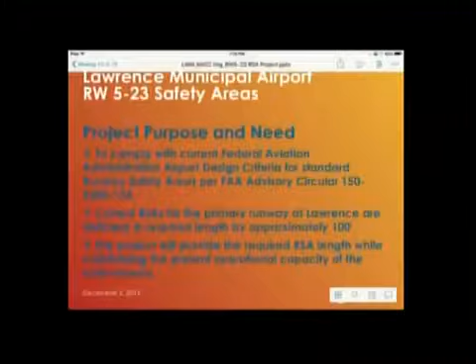Be you an airport in Arizona, California, or Massachusetts, these are the safety area requirements for your particular set of criteria at your airport. And it's a way of making sure you have continuity between the airport system throughout the country, and even internationally to some extent, because the FAA advisory circulars and design criteria end up in some of the federal international regulations as well. And so again, when a pilot leaves here and flies to another airport for the first time, he can expect a similar set of circumstances, requirements, design criteria at the airport that he's going to. He does not need to be familiar with that airport to be safe in landing, taking off, etc.

Current RSAs for 523 are 100 feet short. They need to be 300 feet long by 150 feet wide for the airport reference code for that particular runway. As we were with runway 1432, we are a B2 airport reference code. And if you were to go to the design criteria in that advisory circular, you would find a clearly written table requiring that 300 by 150 foot dimension for your RSA. So that is beyond the runway end. You need that level turf surface, suitably compacted to hold up an aircraft if it undershoots or overshoots a runway.

And now we have 200 feet plus or minus beyond each runway end. We need 300. So in the overall length of 523, we're 200 feet of level area short in what we need to provide safety areas at each end. And the project will provide the required RSA length while maintaining the present utilization of the runway, the present runway length, present runway operational capacity.

And the corollary to that is this project has nothing to do with improving capacity, improving the size or speed of aircraft that use it, or the number of aircraft that use it. It will have no effect on that whatsoever. It'll just bring that runway up into meeting one of the design criteria that the FAA mandates for an airport of this type. Next slide, please.

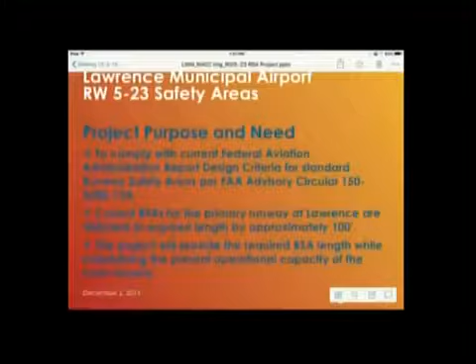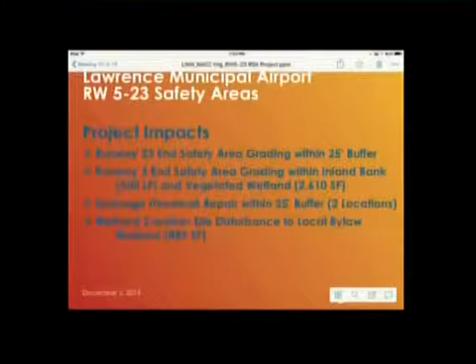We have a wetland creation site that is about 20 foot tall of old fill soils, asphalt, concrete, you name it, it's in there. Poor internal drainage has allowed the establishment of a little cattail stand on top of it. And in order to develop the wetland creation site, which is quite a large one, it's over 8,000 square feet, there is a local bylaw wetland associated with those cattails of 882 square feet that we'll be impacting to properly remove all that fill, remove all those invasive species, and actually create a wetland creation site at that location.

Good news, 882 square feet doesn't make it. It's not jurisdictional. Under your bylaw? 1,000. Aha. So, good. Missed that, sorry.

The runway 5 end, I actually pushed this alternative on the engineers. We were going to go with a straight culvert for the intermittent stream that we're crossing. I went with a relocation, so there's actually 600 linear feet of inland bank associated with relocating that intermittent stream around the end of our new fill. But by doing that, we're creating a certain amount of bank as well, and we're impacting 550 linear feet by relocating it.

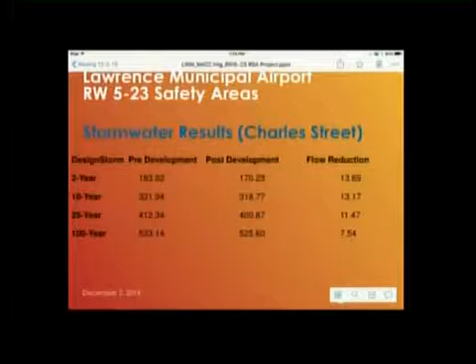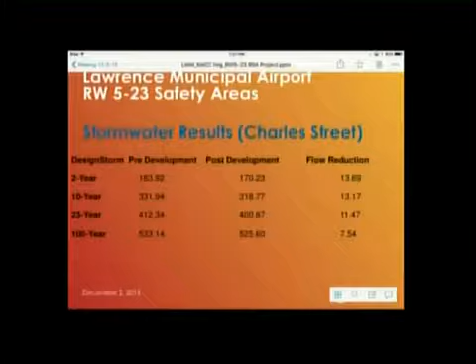Stormwater results. We have 2 design points, one at Charles Street, where our drainage leaves the site, and one at Holt Road. Charles Street, just real quick, for the 2, 10, 25, and 100, you'll see pre- and post-development. Because of this pavement reduction, we're actually getting flow reductions at those points from about 13.69 CFS for the 2-year storm, and at the 100-year storm, a 7.54 CFS reduction. So everything is less, and quite a bit less, over that span of storm events. Next, please. That's for Charles Street.

That is in the driveway going up to the sewage treatment plant. So all our drainage crosses their driveway in a double culvert. That's our design point. This one at Holt Road, if those of you know Holt Road real well, all our drainage from that 23 end of the runway all goes under a single culvert. It goes behind that capped landfill, and that's our design point leaving at that site. And you're going to see significant flow reductions, 20.95 CFS for the 2-year, 21.1 CFS for the 100-year. Again, mainly due to that 6.2 acres of pavement reduction at the site. Next, please.

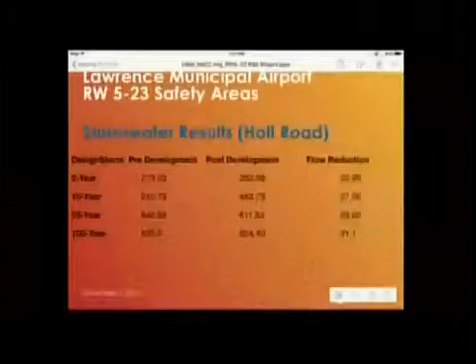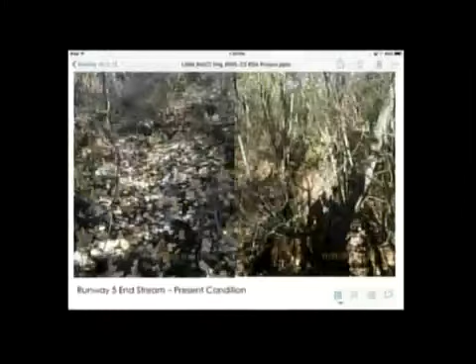And this is a picture of the channel on the left, and it's pretty tough to see, but that's about a 5-foot wide intermittent channel, devoid of water. It usually is. It's dry most of the year, but when it rains, it flashes up really quickly. It drains everything, all those residential side streets along Sutton Street, all the way up to where we have that storage garage on the airport property as you're on Sutton Street.

That whole area, all those hangars, it all drains down to this. All that residential side streets off Sutton Street all come down to this point. So it's a lot of pavement in this watershed, which explains the real flashy flow nature. So this is just two representative photographs showing the condition of the channel, its dry nature, and some of the typical vegetation associated with it.

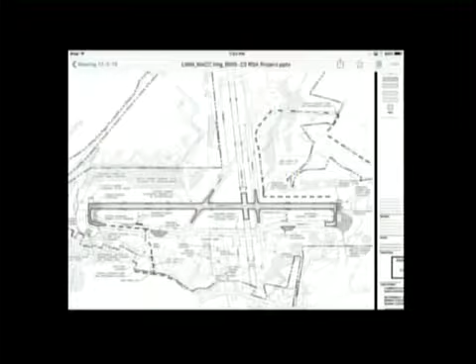We had to chase down that taxiway until we found a place where we could actually put a run-up area that wasn't going to interfere with wetlands. Typically, those run-up areas are all the way at the end of the taxiway, right next to where you enter onto the runway. And so he runs up his aircraft and enters onto the runway pavement right away. We had to come all the way down the taxiway to create two new asphalt bump outs, these run-up areas, kind of in an atypical location. And so those represent places where actually new surface will be paved for those run-up areas. Yes?

As another benefit for that one at the 5 end, we have residential properties pretty close to the property line there at the 5 end. During the master plan process, there were some complaints about the noise of run-up, and it can be a noisy process with some aircraft, and so that run-up area was moved a little bit further down, also to accommodate the wishes of residents that were on that master plan committee and had those complaints from that neighborhood. So there's another benefit of moving that run-up area further down the taxiway. Next, please.

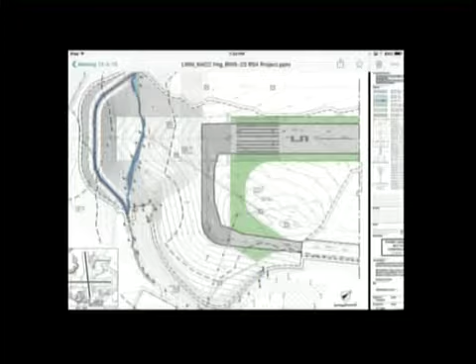So here's the 5 end. We have two blue lines there. The one that's very symmetrical is our stream relocation. The one to the right of that is the actual intermittent channel. We delineated the bank, which gave us the dark blue color there, and there were some narrow strips of vegetated wetland outside of bank in a few locations, and so you have some light blue along that that represent a patch of vegetated wetland here and there along that channel.

So we could have reduced the wetland impacts quite a bit by just going with a culvert through the fill. So if we had just put a culvert in the intermittent channel, we'd be reducing impacts quite a bit. For the stream openness standards and the stream crossing standards, we'd have a culvert somewhere in the 10 by 10 to 14 by 14 range to meet the openness standards because of the length of the fill here.

And the length of what we'd be putting in a culvert, that size culvert. We did a habitat assessment on this particular channel, and we do find it being used as a conduit for a wildlife corridor from a wooded section along Merrimack River to wooded wetlands that are just south of the airport along those residential properties. And I think we'd lose that continuity no matter what size culvert we put in there.

And so I came up with a concept of rerouting a channel around the end of our fill, revegetating it, and building it in such a way with bioengineering materials that provides for a higher order channel than we actually have there right now. I won't go into the details, but we have coir mesh logs, a lot of high-end erosion control fibers and fabrics in there, specialized seed mixes, live stakes and stickers of native shrubs versus the invasives that presently dominate that entire system. And so we want to recreate a stream system around our fill.

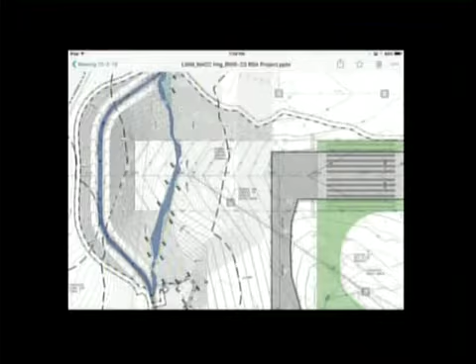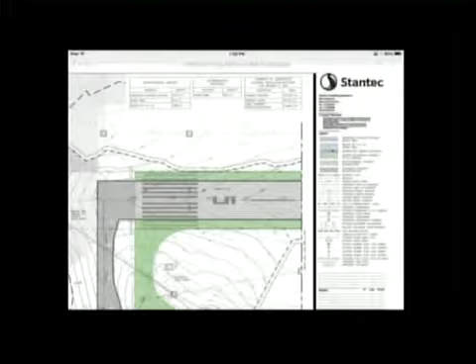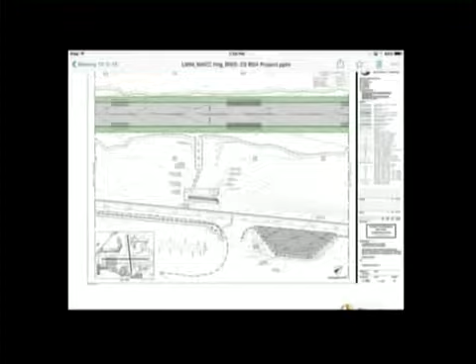At the 23 end, you're going to see something quite different. This is where, again, we shifted everything down to the 5 end to avoid the wetlands at the 23 end. This is just very quickly, typical along runway 5-23, the green represents area that is paved now that will no longer be paved. So you'll see a few slides here where it's just showing you the reduction in pavement width along this edge. Next. And here is that reduction again, and that changed run-up area. And here we are at the 23 end with the next slide.

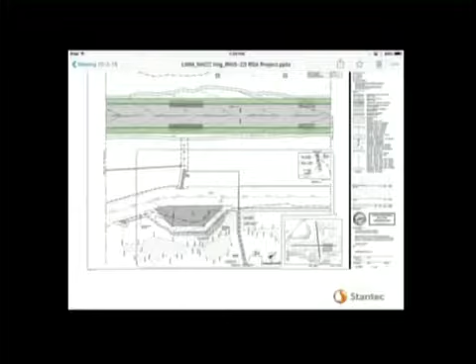So you're in buffer zone with this run-up area? Yes, we are. We moved it down. We came quite a ways down the taxiway. This was the first location available to us to actually build the run-up area. We are outside the 25-foot, but just like 26 feet away. We're just outside of the 25-foot with that.

So here's the 23 end. You're going to notice that there is a new threshold location. So you can see the faint outline of where the runway ends now with the barred lines. So we're shortening that by 100 feet.

We have to grade that side slope a little bit in order to get the level flat area right at the end of the safety area to give us our 300 feet. So everything is shortening up. The taxiway had to be chopped off and brought back into the new runway end. And all that green area that you see is currently pavement will now be topsoiled and turfed. And all the stuff that we reclaimed from that, all the existing subbase material and asphalt and everything, is going to be used in preparing the new base for our new pavement in our runway.

But we do have that grading right there at the end of the safety area, right above where that emergent marsh is, and that's necessary to support this level safety area and minimize how much we actually had to shift down to the 5 end to get the full safety areas. That grading that you see there at the end of the 23 safety area is within the 25-foot buffer of the local bylaw.

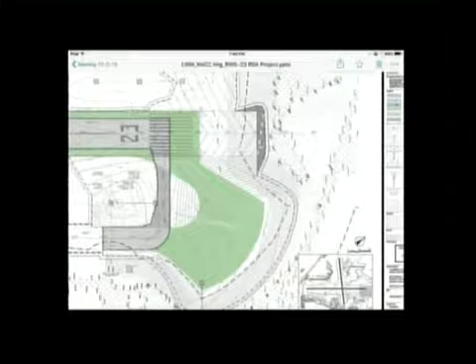But there are no direct wetland impacts at this end at all. And that's the good news with the shift. We avoid that entire system and maintain all of our impacts at one end. Next, please.

Back at the 5 end, and real quickly, there is an entire plan set in there showing you the different erosion control materials we are using for stabilization. We are going with 1-to-1 slopes in a lot of locations, trying to steepen up to minimize impacts. And because we are going with some steep slopes, we have to go through some extraordinary erosion control efforts to control these slopes. The most extreme, which we only use in extreme locations, is a reinforced slope with a riprap cover. You can see at the end of this 5 end that rock-looking type cover. We do have to use some riprap for the steepest section right there.

But as soon as we get out of that 1-to-1 and into something less steep, we are going with soil tackifier and erosion control blanket. That soil glue that we've used successfully on so many projects, and actually implemented on the 1432 project as well, we are using extensively here. And everywhere you see where we're grading in the buffer zone there, we're also going with just soil tackifier without the blanket on top of it. So this 5 end shows you where new pavement is, where the new runway end is, and some of the different erosion controls that we're using to control our slopes in this location. Next.

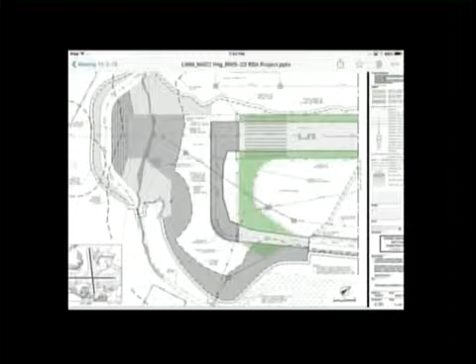23 end, same thing. You'll see a lot of the dark gray being the soil tackifier. You're going to see a little bit of the riprap right where we're getting down close to the wetland, again, because we wanted to hold that toe where it was. So we had to do a little bit of riprap for the steeper part, soil tackifier above it. The rest of the slopes right now are very steep. We're flattening them out a little bit, so they're much easier for Mike to maintain. Right now, he has a very difficult time mowing them.

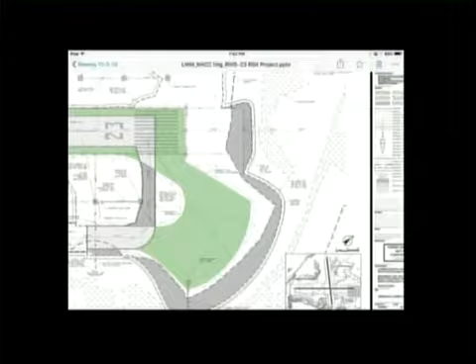So we're actually taking some of the steepness out of those slopes, using some of that fill for our project down at the other end. So there's a maintenance benefit for the airport. Steep slopes are never good from a drainage perspective, but also from a mowing perspective. So again, there's an entire plan set that shows the different erosion controls we're using throughout the project. Next, please.

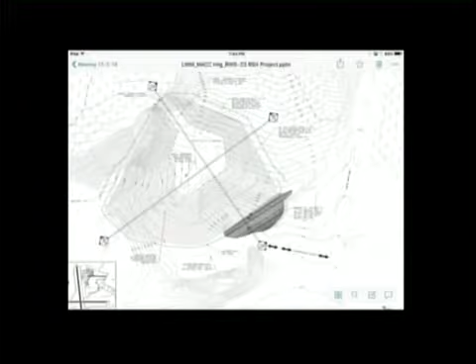This is our, and I don't know if you can blow it up, and thank you, Jennifer, that's great. Our wetland creation site. Again, we're trying to encompass that entire fill area, and more importantly, trying to maximize our grading where all the Japanese knotweed is. We have a bottom floor elevation of 96, and the 96-97 contour is where we get our 8,800 plus square feet of vegetated wetland mitigation here.

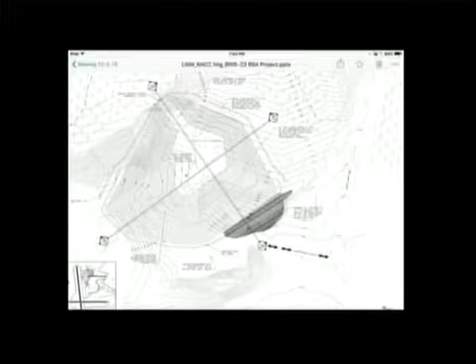We connect out to an existing wetland. The side slopes are not too bad. We go pretty steep right where it's connecting to the existing wetland to avoid taking down any mature trees along the existing wetland boundary. But as soon as we get outside of those mature trees, we go right into a 2-on-1 and 3-on-1. We flatten out those slopes quite a bit.

But again, as Jennifer and I saw in the field when we looked at this preliminarily, we want to avoid taking out any shade trees that happen to be in these fill slopes that are currently shading these wetlands. So the connection, I really tighten it up quite a bit. But as soon as I get out of the connection, we go with much flatter slopes.

This will be a shrub wetland. We have shrub plantings proposed. There is a planting schedule and a wetland seed mix proposed. There is an extensive native or naturalized upland seed mix for all the side slopes. We have a stockade fence to permanently mark and block this area. And there is a nice kind of a landscape type cedar stockade fence that will be installed here.

We also have an invasive species control that not only for our mitigation site, but we go 100 feet out into the adjacent wetland for a cut and dab of invasive shrubs, which are very prevalent in this wetland. We don't want them creeping into the mitigation sites, so we have quite an extensive invasive shrub species mitigation plan for this. We have 5 years worth of monitoring and maintenance proposed in the notice of intent.

It's quite extensive. The reporting, the indices that we need to report to you on a yearly basis, how many plant data plots are going to be there, where they're going to be located. We also have a permanent monitoring well that we're installing in here with a permanent water monitoring device in it. It takes a reading every half hour as to what the water level is relative to the floor elevation of the replication basin to show you that for the growing season, we have groundwater within a foot or two of the surface for the entire growing season.

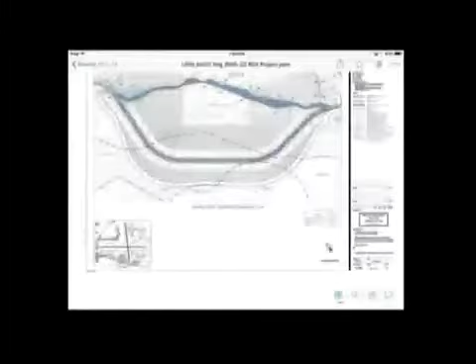And the other mitigation feature is the actual intermittent stream relocation. You're going to see at the top there is where the existing intermittent channel is, and then you can see our blue at the bottom, which is our proposed channel. Those bends that you see are modeled on existing bends that are in that stream, so we know the geology can handle that much of a bend. If we were to go with sharper bends, we'd be able to tighten this up a little bit and reduce our impacts, but we couldn't find anywhere without really a lot of hard armoring supporting anything but about that 45-degree bend there.

Trying to go with a sharper turn than 45 degrees, we'd have to start going with riprap at our corners, and we end up being more of an engineering feature than a habitat feature. So this is what we ended up with. The channel itself can handle the flow rates that we've modeled for the stream. In fact, those data are in the notice of intent. And there are planting schemes, bioengineering materials, and everything established for this relocated channel.

And again, 550 linear feet of bank impacted, 600 linear feet of bank replaced. You can see the proposed stream is a little bit longer than the existing one. And we're also accounting for about 2 square feet of vegetative wetland for every linear foot of bank coming in along this channel, but we don't take credit for that. Our only credit for vegetative wetland mitigation is actually in our wetland creation site. And you'll find that description again in the notice of intent. Next slide, please.

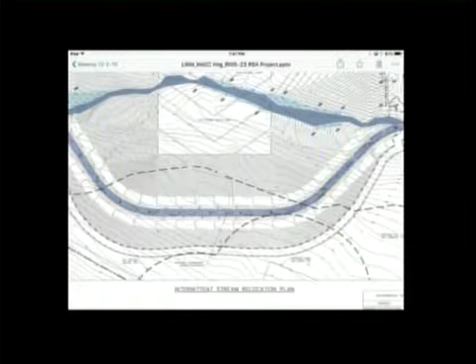So what I tried to present you is a very short version of how we ended up with this alternative to get out of the MEPA process and the wetland variance process with Mass Department of Environmental Protection. We do go through an alternatives analysis in the notice of intent. There are 4 of them described there. It gave you some sense of the result of the stormwater analysis, and it's actually very good news, mainly because of the pavement reduction here.

Gave you some sense of the prime mitigation features involved with the project, the wetland creation site, the stream relocation, and of course the stormwater improvement features. The notice of intent has quite a bit more detail than I've given you tonight, but I wanted to introduce you to the project just to show you what it is.

Mainly what you need to remember is that we are going with an alternative that shifts this entire runway down to one end, again causing movement of nav aids, lights, taxiway entrances, run-up areas, etc. Our original proposal was to just simply build the safety areas off each end, and we were up in between 11 and 20,000 square feet of impact at that point doing it that way.

And so we've actually been able to get it down to about 2,500 square feet from where we originally started of somewhere between 11 and 20,000 square feet. So again, we think the alternative does minimize impacts. Whether it's acceptable or not obviously is in your purview, but I do want you to recognize the minimization attempt that was made by the design team and the Airport Commission with this project.

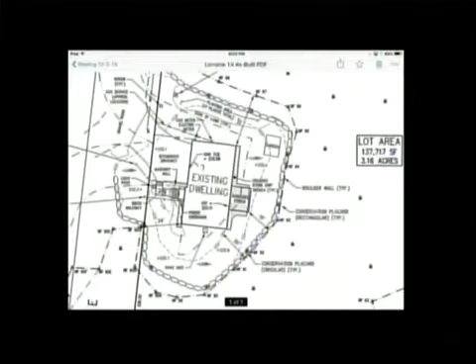Any questions? Motion? I move that we grant the COC request for 14 Lorraine Ave, 242-1480, local bylaw only. Sorry. Second. All those in favor say aye. Aye. Opposed? That's unanimous. Okay, next we have an enforcement order for

1261 and 24216. This is just asking to give them another 2 weeks. Mr. Burke has been in touch with me every week, letting me know he's trying to get all 7 owners signed on to the homeowners agreement for maintaining the stormwater system. He has 6 of the 7 signatures as of now, and I still need an update; he was doing repairs that needed to be finalized, and I didn't hear back on that, so he's asking for 2 more weeks. But from an enforcement standpoint, he's constantly in touch, and I know what's going on, so I don't feel like we're losing it. It's just taking time.

So we need a motion if you're inclined to give him more time. Motion to continue to 12/16. So moved. All those in favor say aye. Aye. Opposed? And that's unanimous. And just for the record, I recused on those votes. Just for the record, that's to continue to the 16th, correct? Yes. Correct, yeah. And we have a decision, 242-1668.